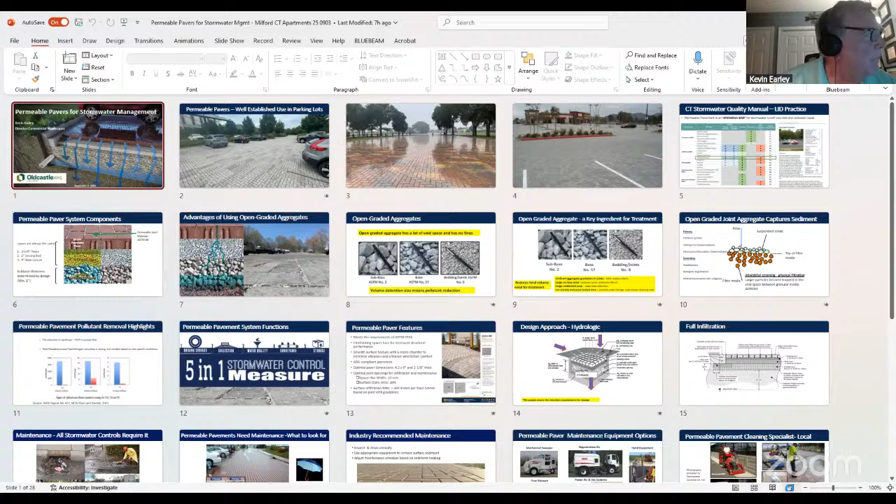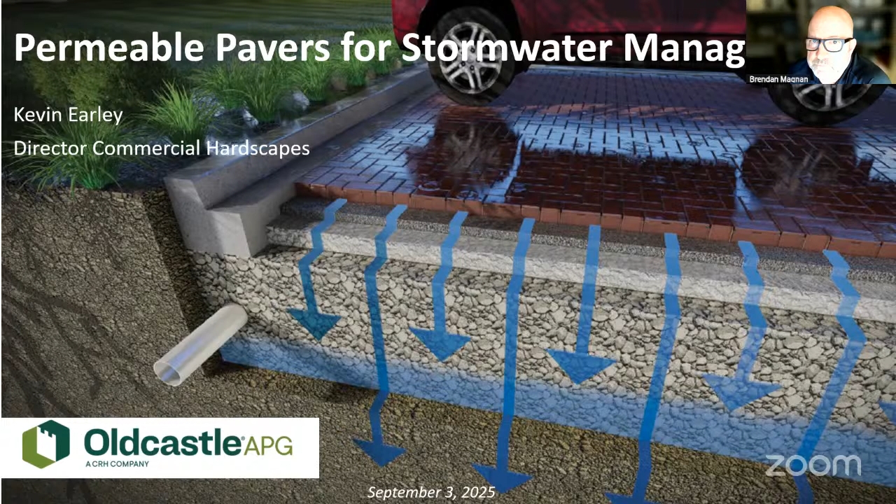So hello everybody, I'm Kevin Earley. I'm the technical service support person for Oldcastle, a manufacturer of permeable pavements. Like I said, I'm a licensed geologist. I've been in the concrete paving industry for over 25 years. My experience with the industry involves work with the American Society of Civil Engineers in creating standards. You have a copy of my resume.

I was asked by the applicant to give a short presentation on how permeable pavers work. This slide deck will explain how the system works and infiltrates stormwater as a green stormwater infrastructure. I've had the fortune of seeing permeable pavements throughout North America over the last decades, and there are hundreds of millions of square feet used around the country, primarily as a solution for addressing stormwater control, flood control, and water quality issues.

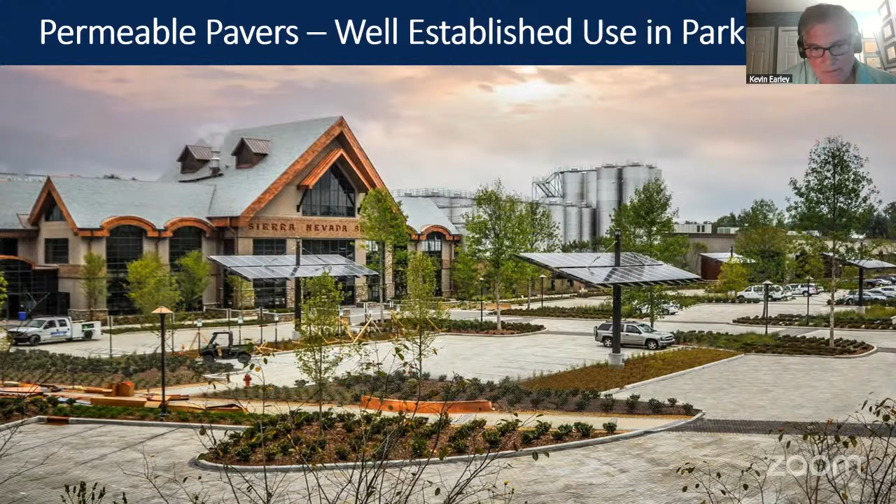It's become a very effective, recognized stormwater control measure. Every state in New England recognizes permeable pavers as a best management practice, as green stormwater infrastructure, including Connecticut. What we've seen is that it's very well established in parking lots. It seems to be the ideal application. Projects, whether residential or commercial, that have pavement can utilize it in a way that provides that surface but also infiltrates the stormwater in a nature-based solution. A lot of people don't realize it, but permeable pavers are recognized by the engineering industry, by the American Society for Testing and Materials, as a nature-based solution because of the way rainwater infiltrates these surfaces.

So what we have are pavers in this particular parking lot here on the East Coast that have joints. Those joints, as previously referenced, have 11% surface open area, and basically eliminate stormwater runoff because the aggregates in the joints and the underlying materials are highly permeable. I hope to explain that to you. Here's a picture of a permeable pavement municipal parking lot in a heavy rainstorm event, and it is basically drinking the water into the reservoir.

So well established, and then within the stormwater quality manual in Connecticut, everybody recognizes that it is an infiltration BMP, right out of table 8-1, and it is recognized for not only retention but water quality treatment. In fact, in a lot of states in the United States, it gives presumptive credits because it's well recognized that when we run rainwater through aggregate, we get by default filtering and removal of pollutants.

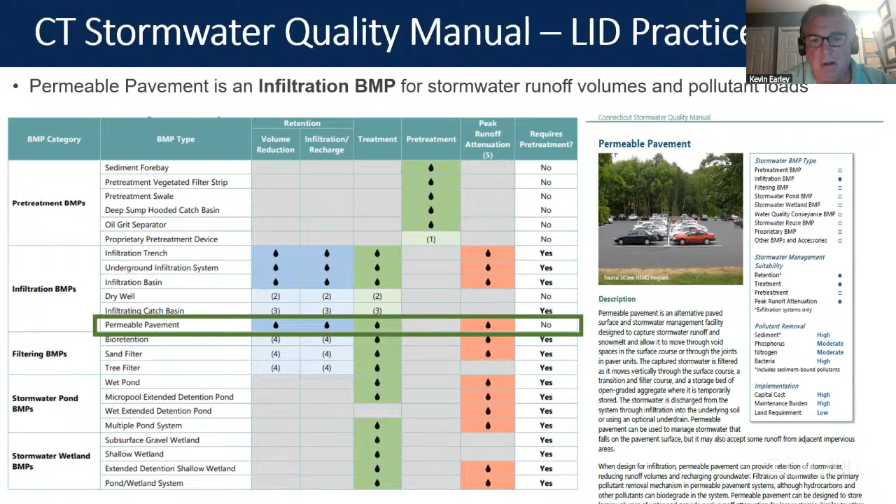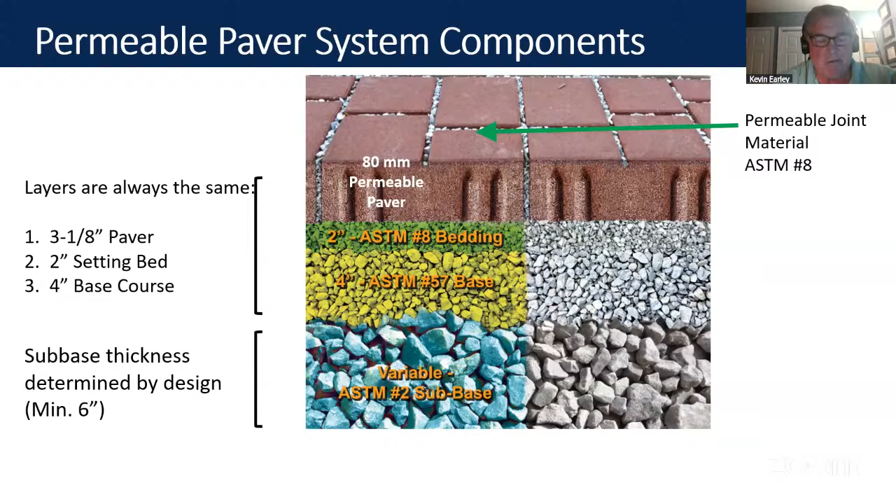So these typical assemblies involve a concrete paver that's typically 3 1/8 inch thick, which is what the applicant has proposed, with these permeable joints filled with an aggregate, and they sit on a bedding layer that is chip gravel, a highly permeable material. It's available at all quarries throughout New England, and it sits on this layering of open graded aggregate. I'd like to explain what open graded aggregate is, but this is the industry minimum cross section, and you can see that the applicant has more than the minimum subbase thickness required based on site specific design.

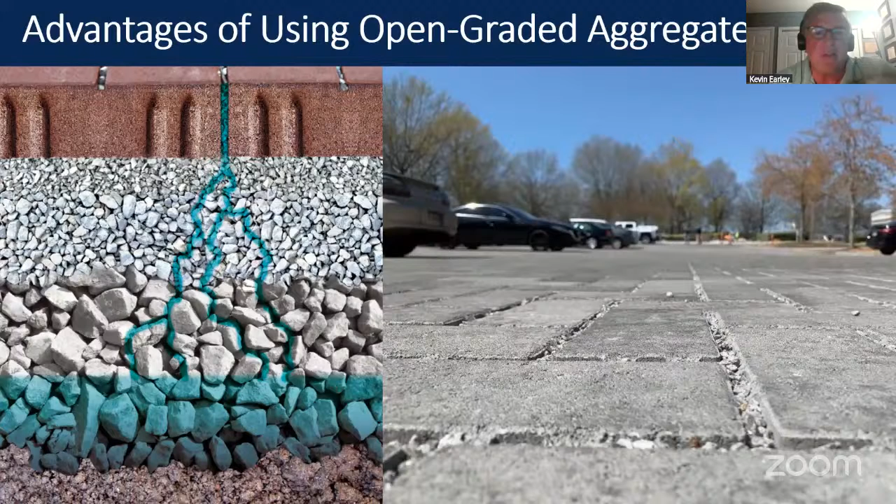So what are the aggregates? They're called open graded aggregates. In the past, when you constructed any parking lot or roadway, you used dense graded aggregates, the traditional road base that's outside of everybody's parking lot today, right? That's dense graded aggregate that has a lot of different particle sizes. This material has a very narrow range, and it's gapped so that it creates void space.

Most regulations give it a 40% void space, so that's volume detention in that aggregate. But along with that comes a high flow or high permeability capability, and there's no fines in the material. So think of it as the quarry fractures the rock and sizes it.

It's very easy to specify this because they have screens. They wash it, and this would commonly be called in New England drainage stone. It's got the same structural capabilities, but it's got a lot of advantages. One advantage is that by not having the fines, it's not susceptible to frost.

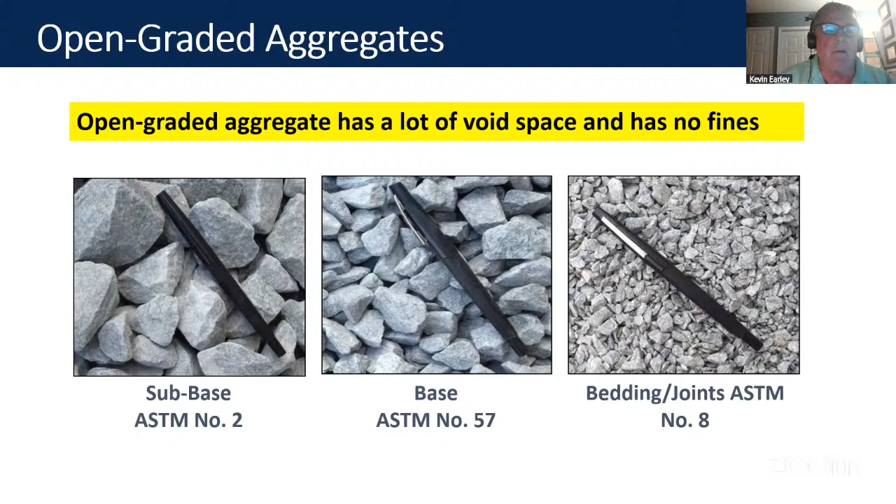They want to keep water out of roadway base material because when that base material gets wet, those fine particles lubricate and get weak. Also, that material can freeze and limit the permeability. The open graded aggregate has the same permeability and structural capability, whether it's frozen, wet, or not. So when I have void space, I have volume detention.

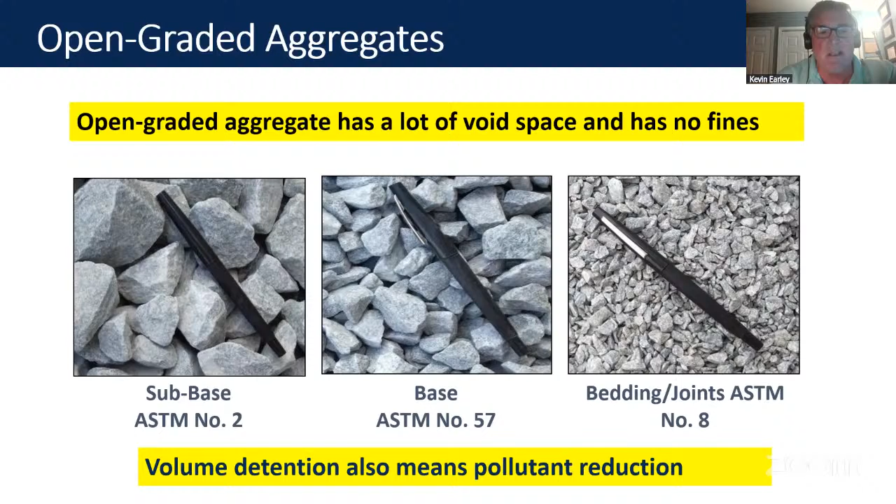Whenever I'm holding volume, whether it's a detention basin or not, I'm starting pollutant reduction. Think of this as maybe like a basin that has pavers on top of it. It's really quite similar. So what are the other features of this?

When you're using these aggregates in the joints, they meet a filter criteria, so of course they're going to capture sediments. That's why New Jersey says by default, TSS 80% removal. If you believe that sediment will get into the joints, well, then it's cleaning it.

Total suspended solids is one of the most common pollutants of concern because it's a tracer of pollutants, whether it's nutrients or other pollutants. It's one of the easiest to track for pollutants.

The other thing is there's a large surface area. This is important because in a parking lot, if you have a dripping oil, people ask what's going to happen to it. Well, if the oil even migrates very far, which it seldom does because it gets hung up on essentially large surface areas, you've got a glob of oil on an aggregate in an oxygen-rich, moist environment very often, and that's perfect for biodegradation.

There are numerous studies in academia that show that in all permeable pavement systems that use open-graded aggregates, you can not only capture any pollutants before they leave the pavement, but it biodegrades. University of New Hampshire proved in a permeable pavement study with this exact same paver as proposed, several years ago at their stormwater center, that we have mass load reduction.

We've got basically a collection box for the rainwater to either filter or settle out, and that includes nutrients. I'll explain how that works as well. So when you have water entering rapidly, at the bottom is going to be the subgrade soil, right?

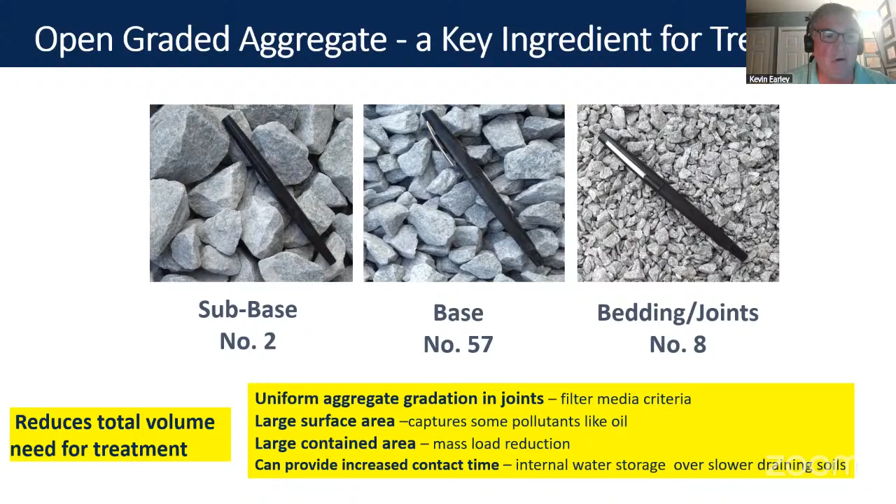So when you have water that sits there, denitrification occurs, and there's documented academic research that we are removing nutrients and phosphorus. Whenever we reduce the volume, we get treatment, and these kinds of systems are proven to treat water quality.

A lot of people ask about capturing the sediments when they come in—they get caught near the surface, and that's a good thing. So we are capturing sediments because it acts like your air filter. Every air filter has an apparent opening size, and that's a consistent size.

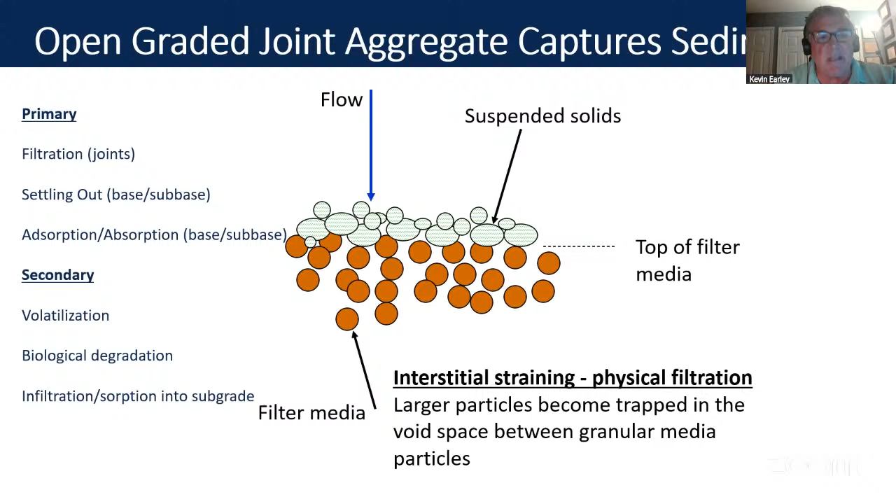It's very much like filter aggregate in those joints. So we're straining physically and grabbing particulate, and those particulates are a surrogate for pollutants when they're there. So we're filtering—if it gets through that, it's settling out, and then it can also absorb. There's some pollutants that will attach into the aggregate base, and then there's secondary processes going on, such as biodegradation.

So that's how it works. It is proven to remove TSS. It is a great filter, permeable interlocking concrete pavement. The documentation from University of North Carolina, from UNH, and from multiple academia shows that there is nutrient and phosphorus reduction.

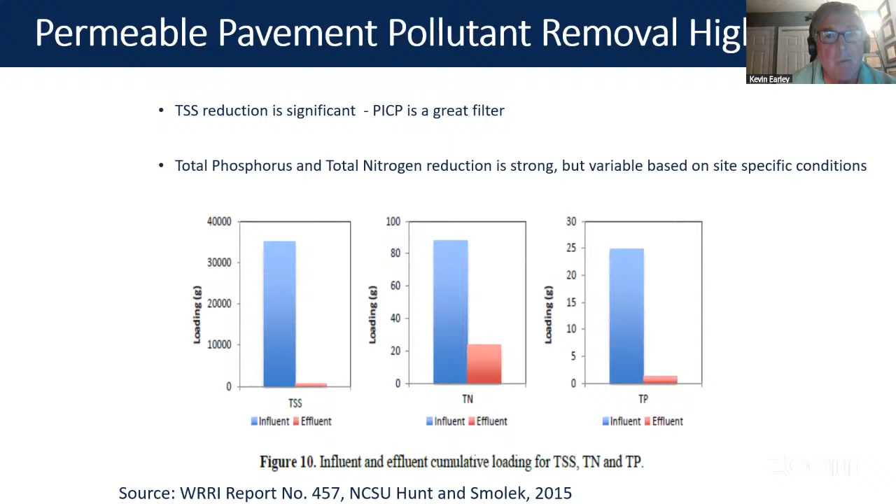It is based on site conditions and how long the water sits there. So what do we have in these systems? First, it's a driving surface - a heavy-duty pavement. There's no question we exceed strength requirements, with design data for up to 1 million axles by the American Society of Civil Engineers.

Second, it's a collection system. The openings are the inlets, and this is why it's considered green stormwater infrastructure. We are not concentrating the water in a stormwater inlet - that's gray infrastructure, which means high volume, high flow, and wherever that discharge is, you've got thermal loading too. Another benefit in treatment is when you infiltrate naturally into the ground over a large surface area like a parking lot, you avoid releasing warmed water into streams during the summer. These infiltration openings have a high surface infiltration rate, with plenty of test data showing well over 500 inches per hour.

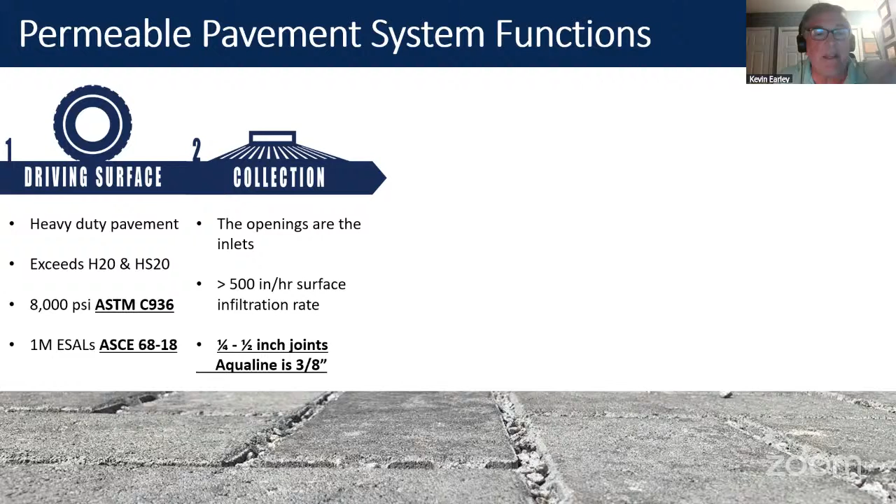So the surface is never the limiting factor. Those joints that produce that 11% open area are 3/8 of an inch, or 10 millimeters - exactly between 1/4 and 1/2 of an inch. That's a good thing because aggregates you can specify in New England, like ASTM number 8 stone, are 3/8 inch chip, so they fit the gap. A bigger gap is not better - it would let the aggregate leave the joint, and a smaller gap would make it harder to maintain. A lot of academic research has shown that's the sweet spot.

We talked about the water quality benefits, which include heavy metals - that's there. We're really conveying and moving the water. There's typically a slope, but a lot of places use it for delayed time release, so the rain event occurs, it goes through the system, and then if it has to come out, it comes out. That saves a lot on downstream effects. That's our problem when we pipe and gutter things - we take a high volume with a peak flow. So now when you infiltrate it in a nature-based solution like permeable pavement...

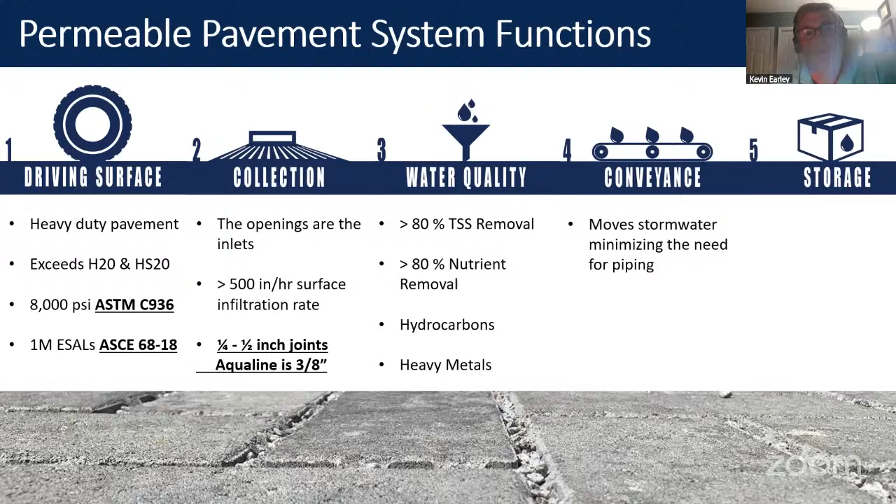Mr. Earley, it seems like you're frozen on the screen and we lost your audio. Amaris, is that what you're seeing on your side? Yeah, we've got a static screen and I've lost visual with him. Yep, and he's dropped off. Yeah, so he probably had a technical issue with his internet.

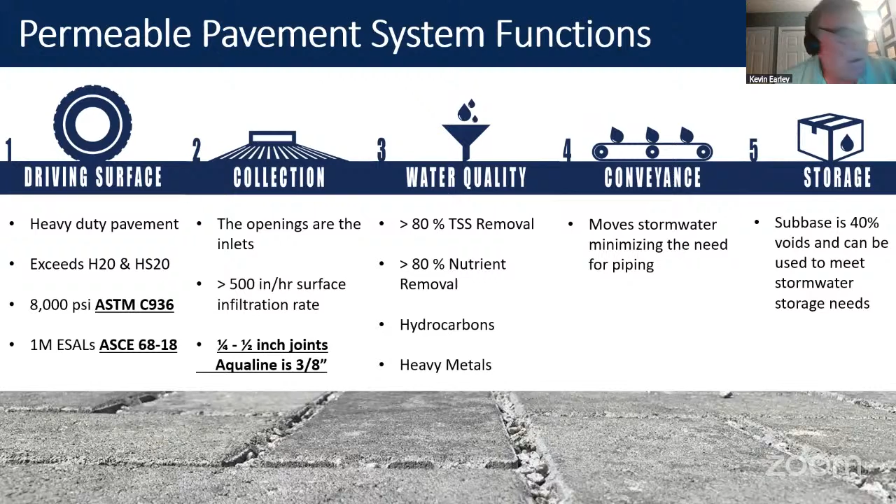Let's see if this works here. All right, are you seeing? Yes, we are. All right, so I don't know if you had heard, but I was talking about the permeable paver features. It was your last point on the prior slide that you were speaking to when we lost you, under storage. Storage, okay, so I apologize about that, I don't know what happened. No problem - in my experience using all these broadcasting systems, Zoom to me is the least stable.

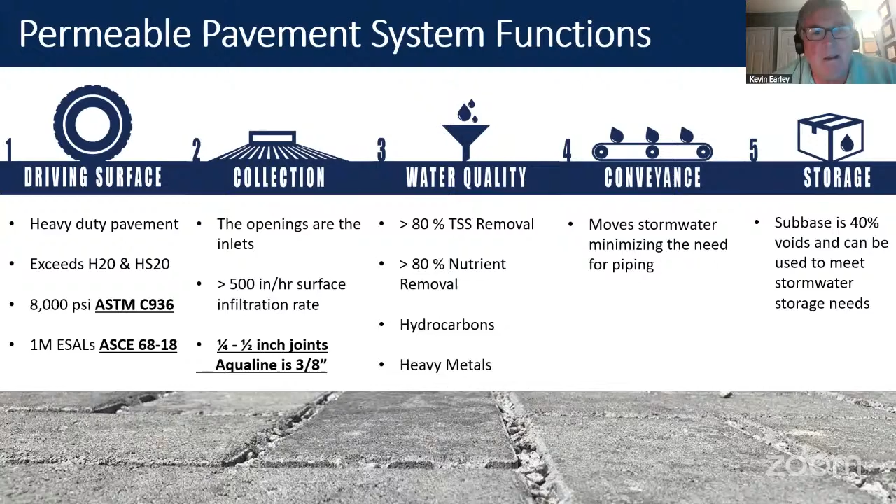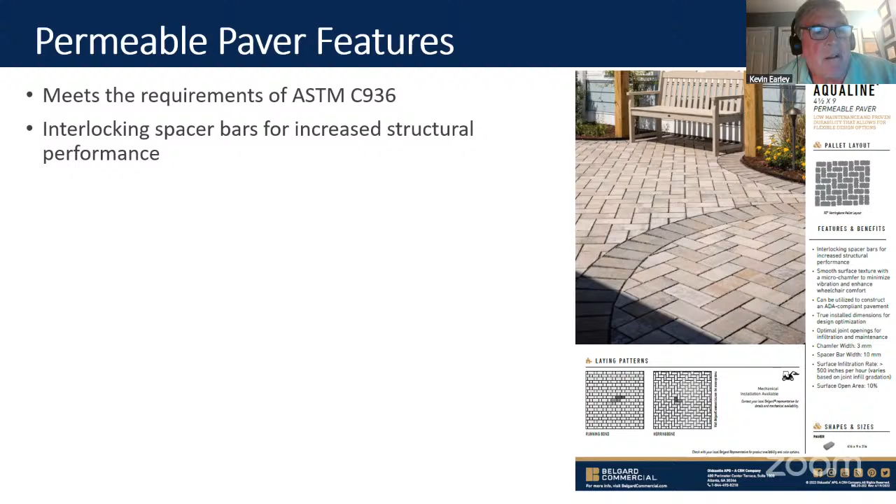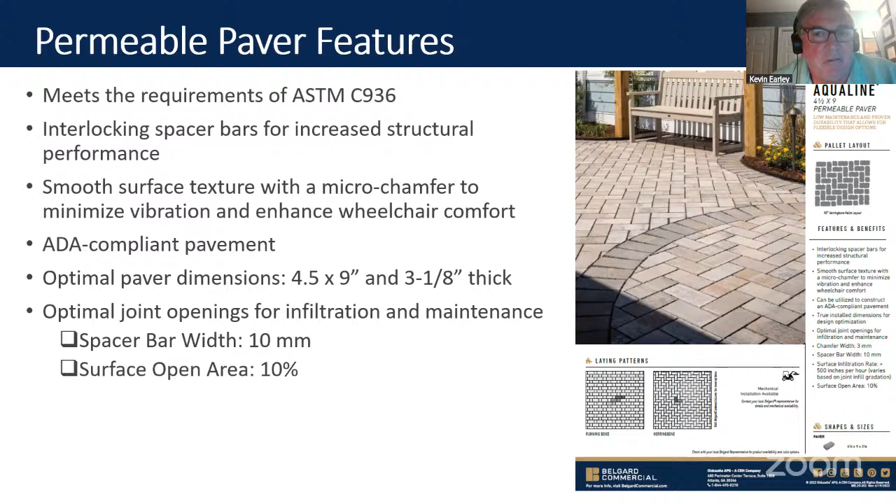Anyway, so yeah, there is the storage benefit of having all that open graded aggregate, and you get those 5 benefits. The permeable paver proposed by the applicant is a rectangle, which is structurally the most ideal paver as far as strength and interlock. The product has spacer bars, a smooth surface, and it's used for ADA. It's got micro chamfers - it's really at an optimal size, with an optimal opening for infiltration and maintenance. These are the things on the spec sheet that you've probably seen.

So just to summarize how the design works with permeable pavers: you consider the design storm requirements, any contributory drainage, which in this case is not significant, if anything, and you basically design these systems for that type of detention.

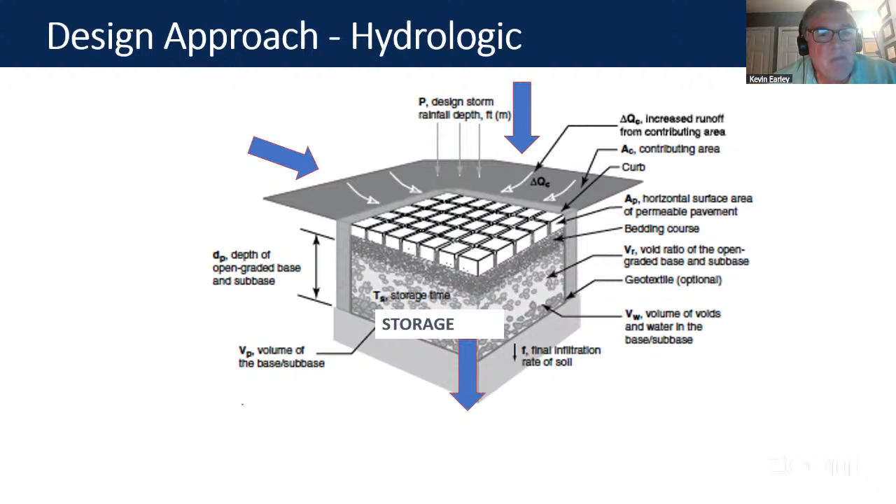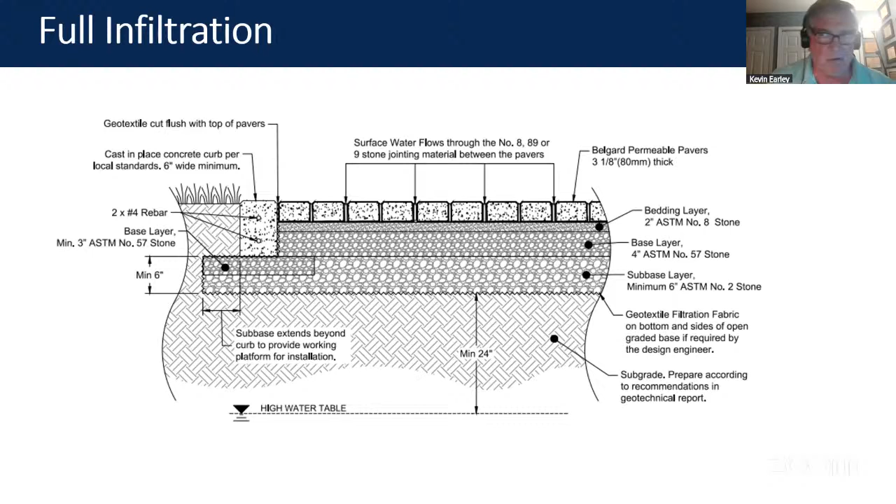And that's what the applicant has done to meet the retention requirements. In their submittal package, you have a typical infiltration detail where there's more than the minimum subbase required by industry standards. Notice the 2 feet separation, which is the requirement in Connecticut when you don't have non-potable water.

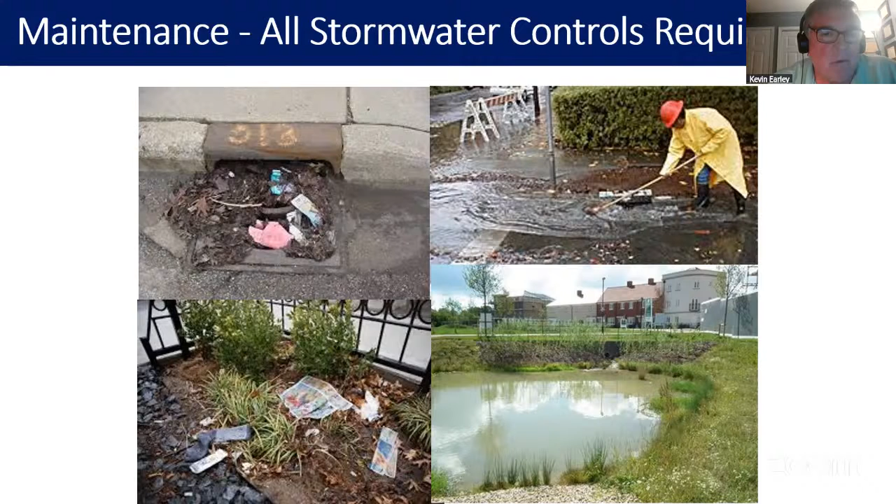There was a question I was asked about maintenance. All stormwater control measures require maintenance, the traditional ones as well as the green infrastructure ones. I think it's one of the best advantages: if there is sediment causing clogging, you see it, and it's very easy to maintain because it comes in along the side, but it's a very isolated hotspot. That's because when the rainwater hits areas where the joints have picked up sediment, it gets resistance to flow, so it goes left and right because it's a heavy downpour until it can infiltrate.

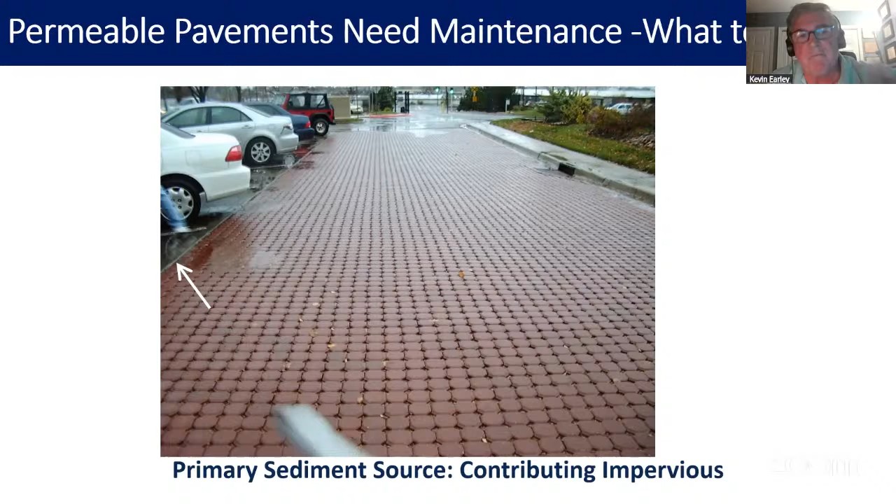There's a lot of research showing this is the ideal scenario. Much like your air filter still works, clogging is not an issue, it's a reduction in flow. But we have high flow on these permeable pavements. These test out initially at 700 to 800 inches per hour, and as we collect sediment, as it works as designed, that will come down. But 700 to 800 inches per hour is several orders above the subgrade infiltration. So your air filters, your HVAC, still works when you collect sediment in your air filter. It's the same kind of thing.

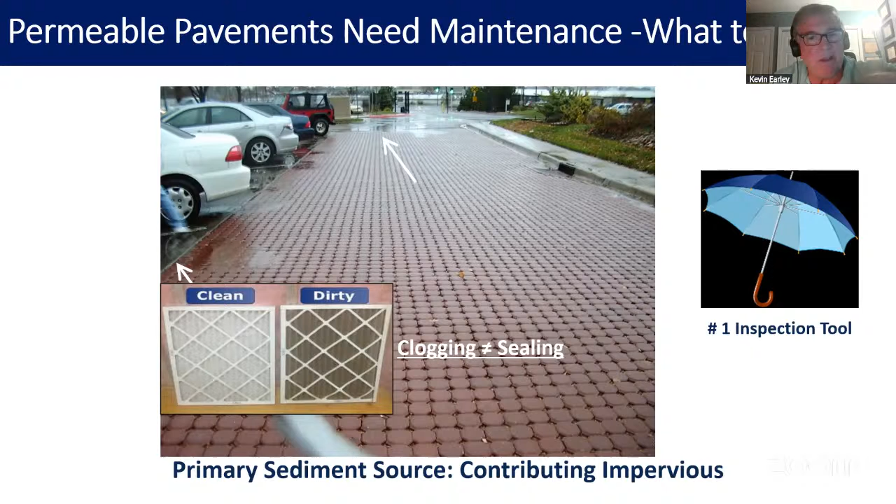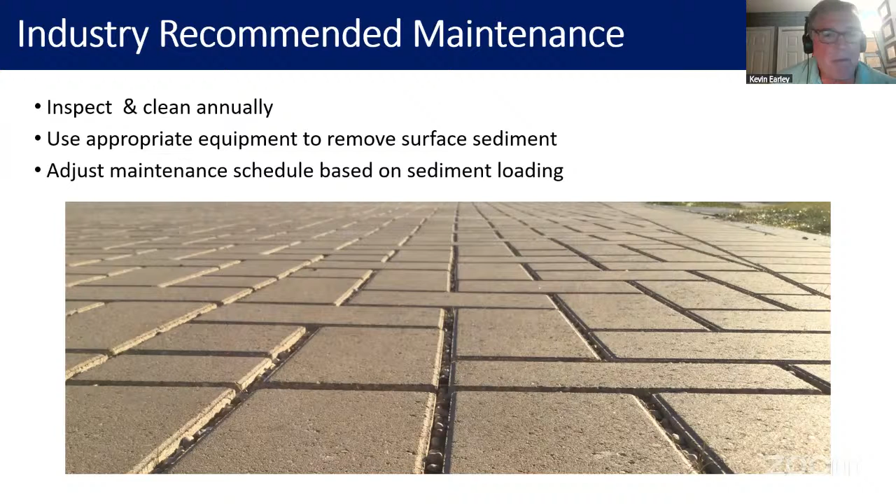So you can see this. Other stormwater control measures that have confined space are tough to inspect. These are easy, and the industry has guidelines on specific cleaning. You want to do routine maintenance to just keep that crust from developing. It can be done with a range of equipment. There's no shortage of machinery designed to clean pavements.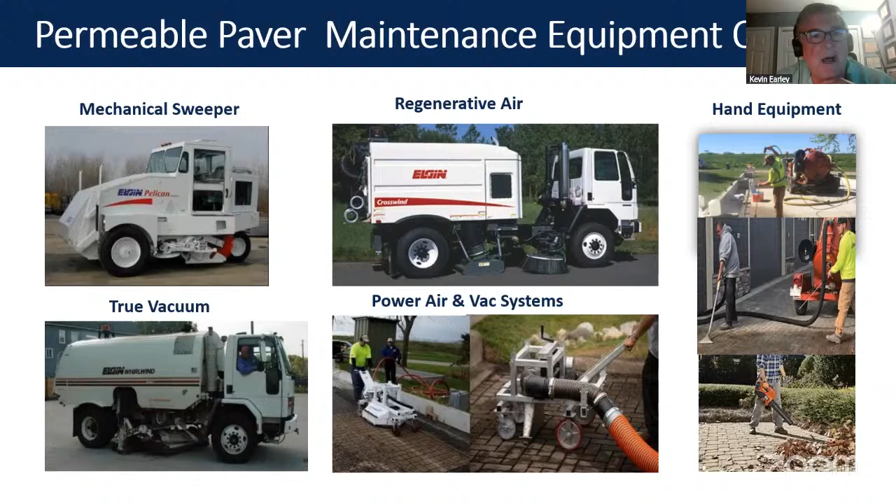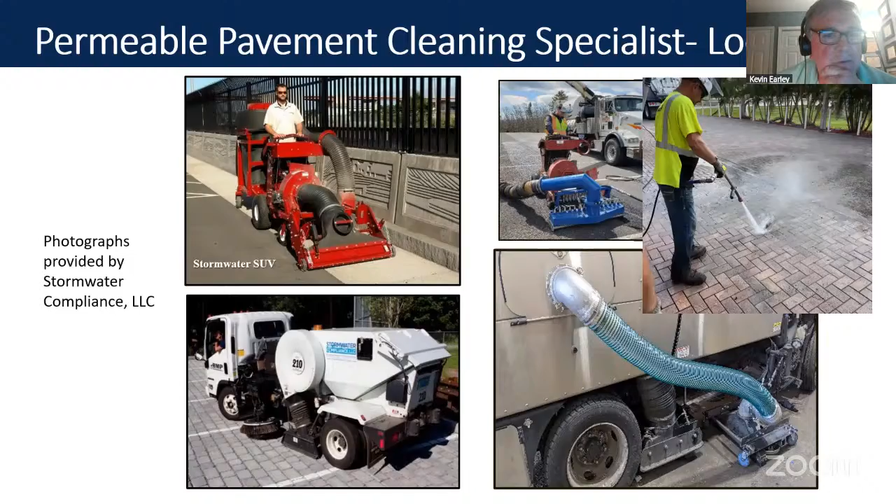There's such a thing as, I think, 1-800 Sweeper, probably right in your area, where you can get mechanical sweepers that can not only clean those joints, but have a vacuum assist to put sediment in the hopper. And there's all kinds of things, even backpack leaf blowers - I see a lot of utility people use those to maintain them. There's companies, one in New England, Stormwater Compliance, that specializes in cleaning permeable pavements. So plenty of equipment, plenty of solutions, easy to replace joint aggregate if it's lost.

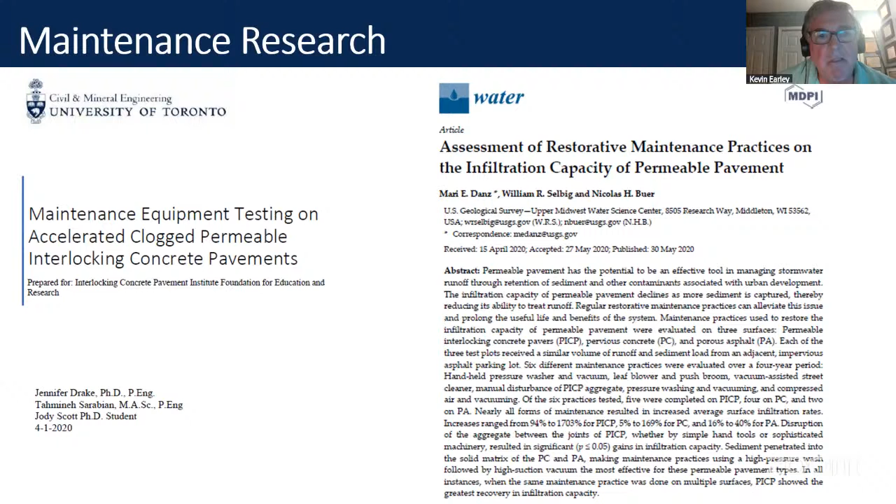It used to be, do permeable pavements work? We are well beyond that. It's pretty well understood by every regulatory agency at the federal and state level that this is a BMP. That's why it's in the Connecticut manual. A lot of people say, well, what about the maintenance? In the last 5 years, there's been a lot of research on the maintenance capacity and equipment testing.

I'll highlight one example: the US EPA's ongoing testing of clogging of permeable pavements, and just the conclusions of this ongoing research. This is done at a site in New Jersey, showing that the clogging is not random, it's isolated where you'd expect, and it's slow. It takes a long time for these systems to be a problem where you have to restore the joint infill. This site in particular is ideal because there's no contributory drainage that would bring runoff from impervious surface, and roof drains are clean, so when piped into the system, they don't impede the rainwater infiltration.

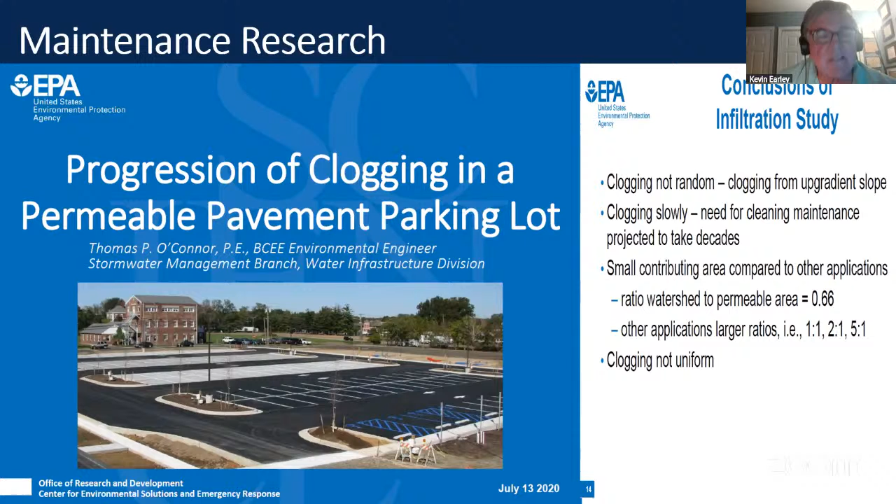They're piped right into the system, and a lot of systems can take a lot of water from roof drains if the space is done. This is why it's considered 100% pervious. There are academic references that say these systems don't produce runoff, and I've seen it documented by academia. When they don't have contributory drainage area in particular, the water is going to go into the system, and what happens inside the system is a function of the subgrade soils. In your case, you have good soils.

People ask about winter performance. This really is a selling feature of eliminating black ice.

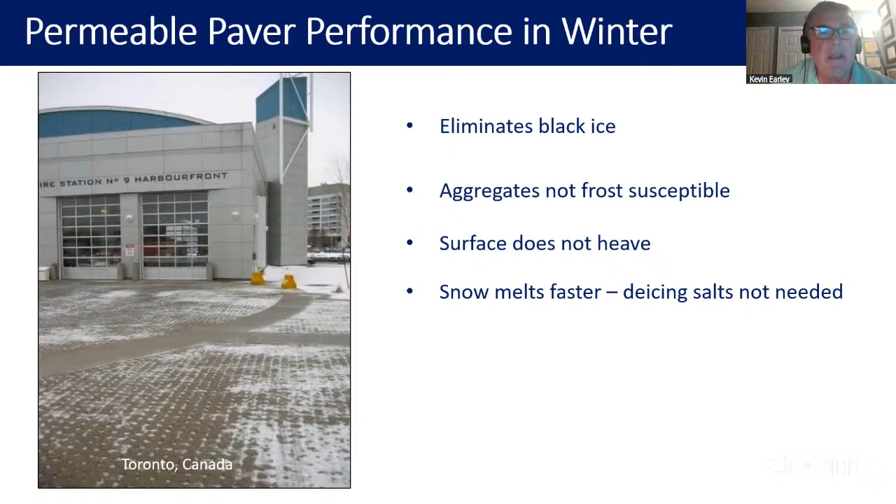Municipalities spend a lot of money on de-icing salts, which is bad for the environment, and that's because of the refreeze at night. Well, when you have a permeable pavement surface that infiltrates at the surface, you don't have the black ice. Second, the aggregates are clean, not susceptible to frost, and you've got that void space. So these systems are very stable and don't get interfered with by winter conditions.

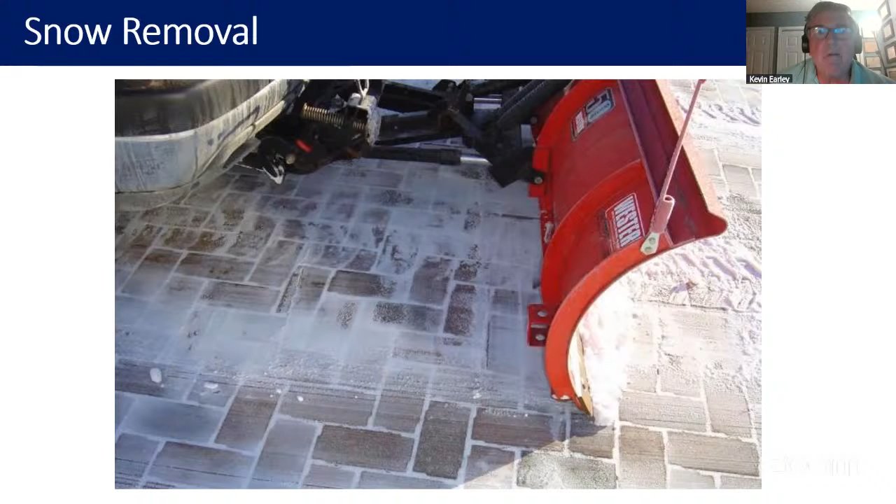In fact, they're used more frequently per capita in Canada than the United States, and they're used in New England and in Europe. They can be plowed. People ask, can they be plowed all the time? Remember, they have a chamfer, and they are regularly plowed on surfaces.

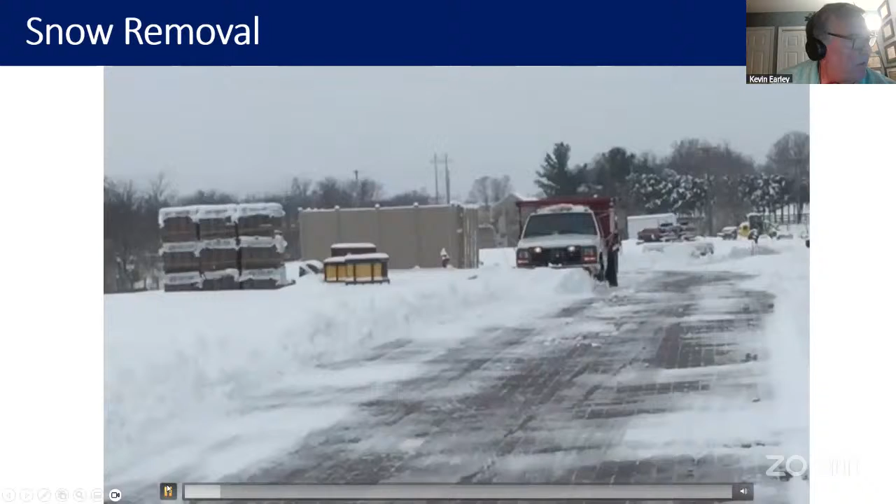Actually, I think this thing plays. I don't know if you can see it, but people ask if it can be plowed, and of course they can be plowed.

So I'll leave you with one last thought from a professor at the University of Connecticut, Professor John Rosen, who has been advocating green stormwater infrastructure. His whole premise is that traditional design takes the water and says, let's collect it, pipe it, and centralize it, and that's where we manage the stormwater. So curb, gutter, pipe, pond is a very common solution because they know exactly the volume they have to manage. But it's old school, and in many municipalities and some states it's no longer acceptable.

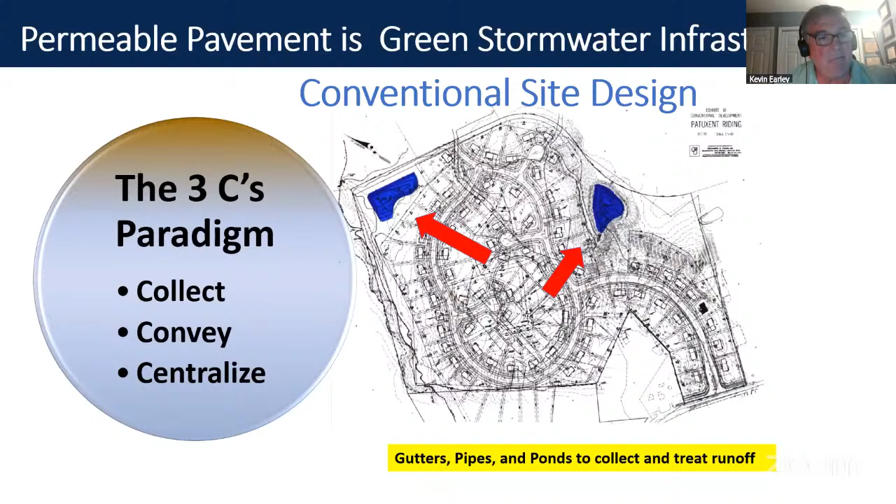You have to use LID. He basically said the 3 C's have shifted to the 3 D's: you want to distribute and decentralize the water. Well, a pavement and the joints in a pavement area distribute the water. That's why it's a nature-based solution, and why everybody considers it green stormwater infrastructure. It's a decentralized process because you're infiltrating it right there. So I think the future really is low impact development.

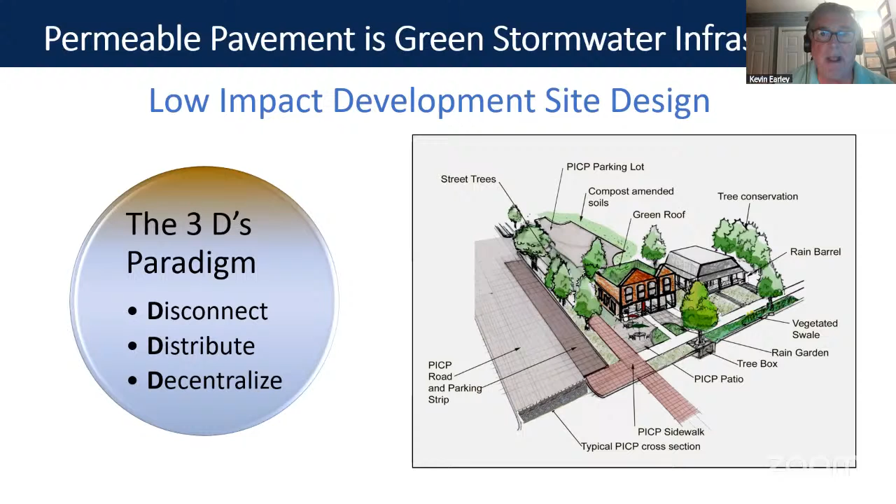So unless there are any questions, Mr. Chair, that concludes my testimony.

Thank you, Mr. Earley. My only observation and request would be on the slide you referenced regarding the clogging study for the EPA, if you could provide that following up. Yes, we could do that. I'm sure there may be others with questions, but that's just top of mind.

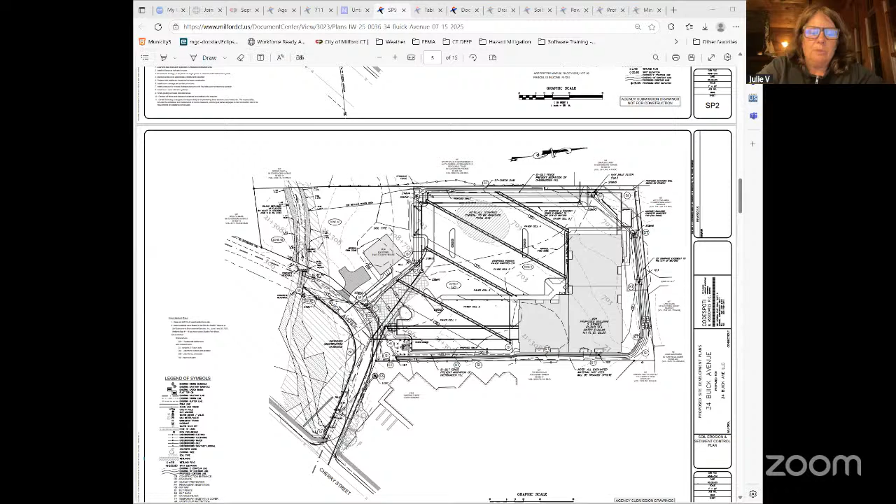Through you, Mr. Chair, you actually just touched on a concern that I have, which is the flooding concerns on Sunnyside, where residents currently have flooding issues. I'm afraid this project could potentially negatively impact the flow that's already there and potentially make it worse. With what you have planned, do you anticipate that making the drainage better from what's happening over there? A lot of folks complain that when it rains, they get a lot of backlog in their yards. If there were more negative impact on increased flooding to their properties, what would happen with that?

Yeah, the only thing I'd like to caution is we need to be focused on the wetlands impact as far as flooding. That's not wetlands? Okay, well, flooding is a gray line, but I just want to make sure we're balancing the statutes around that.

Through you, Mr. Chairman, the Wetland Agency does not have control of flooding. Where we ask flooding questions is if this area floods, will there be additional materials running into the wetlands that could negatively impact them? Will the speed of the water getting into the wetlands additionally erode an area or cause a problem in the wetlands—dumping material debris, eroding away surfaces, impacting the water quality in the wetland and the turbidity in the wetland.

Thank you, thank you for that clarification. Mr. Ricci?

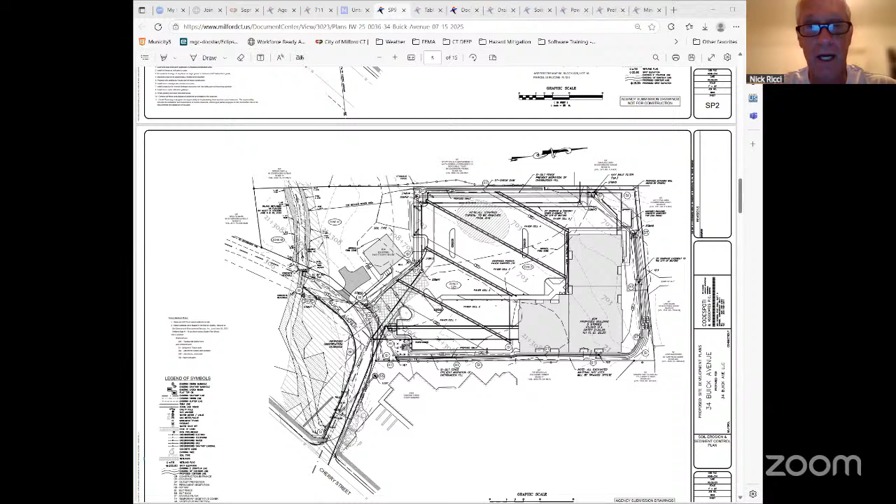I don't know if I could even speak on behalf of the Wetlands Commission about this, since what Mary Rose said. I am familiar with Stubby Plain Brook. It comes from northern Milford, it goes from 0 to 100 in a rainstorm, and upstream it affects downstream. My concern is the overall scope of the project and any overflow from the river in that rain event, where the parking lot, the permeable pavers, and the building are—there's grass and trees there now, which have the ability to slowly absorb that runoff and filter it before it goes into the water course. I don't know if that would be in our purview to discuss now.

Kind of like what you just said—you just expressed a concern that is in our purview. So okay, I believe Mr. Weiwei can address that. And Mr. Weiwei, could you please address the general flooding concerns just for our information as well?

With regards to flooding, when you take a look at the 100-year floodplain, with the exception of the Buick Avenue improvements and our initial driveway access coming up to the first paver cell, the rest of the project is going to be outside of the floodplain. So when Stubby Plain Brook floods and overtops the culverts, gets backed up at the next culvert down by Cherry Street, and that water backs up through Buick Avenue, our project is basically above that flood elevation. And as I pointed out, our paver system is not going to be releasing any surface flow to the adjacent areas in Stubby Plain Brook.

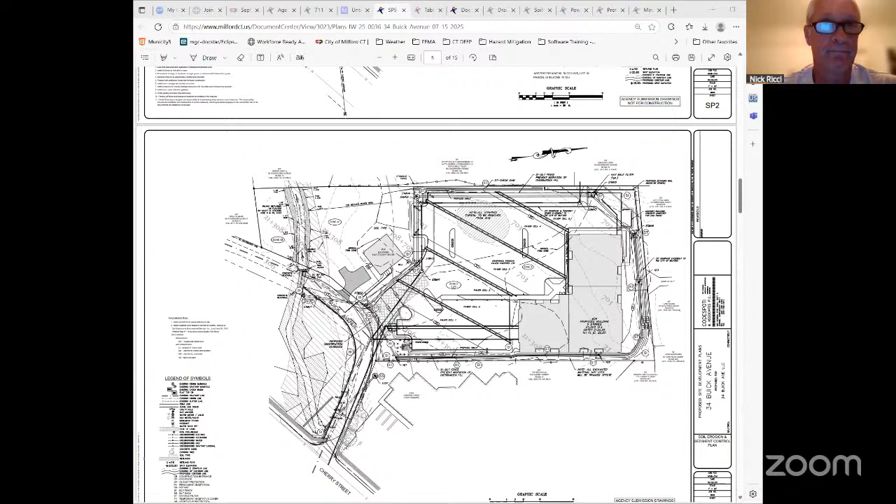Yeah, I think the simple answer to that is when we look at Sunnyside Court and several of the neighbors that presented at the last meeting, Sunnyside Court is probably 10 feet higher than our site. So we have no impact on Sunnyside Court. Sunnyside Court impacts us. And likewise with some of the other neighbors that had testimony regarding flooding of Stubby Plain Brook and everything else, they are up gradient of us. So again, we're lower - we're not backing up any water in Stubby Plain Brook. So those concerns, while valid, really have nothing to do with our project.

Thank you, Mr. Weiwei. On a related note, it seems apparent to me as I reflect on the expert testimony from Mr. Earley - is it Mr. Earley, or Curly? Yes, sorry.

Listening to his testimony, listening to your prior testimony, looking at this design, would you characterize this design as sort of a hybrid, putting aside the Buick Avenue portion - the bigger paver system and - would you try to explain this? What I'm gathering from the testimony is that this application is a combination of the low impact development with the pavers, as well as, as Mr. Earley said, the old school design. It's a combination - it's got those designs on the outer perimeter of the property for the 100-year storm to distribute water. Am I characterizing that correctly?

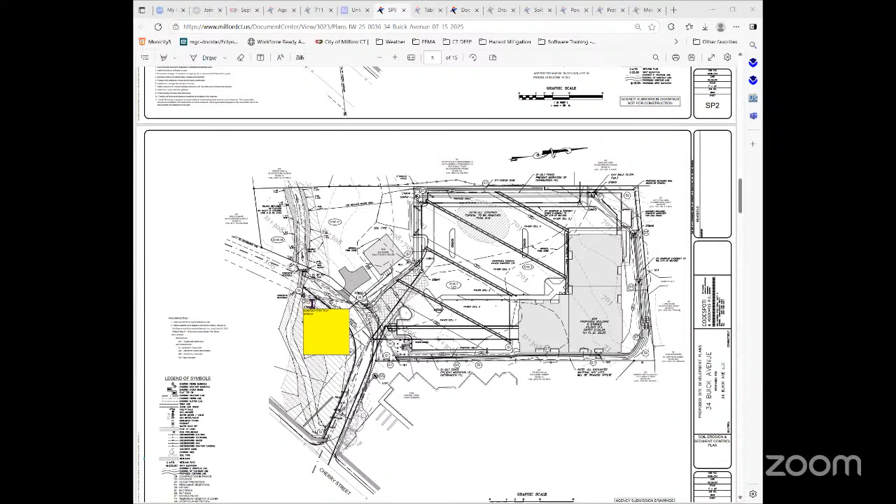No, not the paver system. No, the paver system does not. With what Mr. Earley was getting into in the slide, and I think this is typical of probably 95% of the applications this commission sees, particularly on smaller sites, everything is collected through a catch basin system. It's piped to an endpoint where it's treated through water quality structures, detention basins, or underground infiltration galleries. That does not happen here because we don't have a piped system directing water from the surface.

We do have an underdrain system, but it's basically used to convey stormwater and distribute it throughout the paver cell system. The pipes in there are small, 4-inch perforated pipes that distribute collected water throughout the paver cells. Then, in the case where a paver cell fills up—more pertinent during the 50 and 100-year events—you get a waterfall effect where overflow from paver cell 5 drops to cell 4, then cell 3, until it reaches cell 1.

Right, but just to cut in, what I'm trying to acknowledge is, if I'm understanding your design correctly regarding the wetlands and watercourses, it's a combination—a hybrid approach. You've got a proposed paver system in the center of the diagram, and you've got these interflow directors. I'm not using the right technical terms, but I'm just trying to acknowledge it's not all or nothing, it's a combination.

So if we took the Sunnyside Court drainage problem off the table—if there were no upstream drainage issues—then that pipe system we're proposing wouldn't be there, and we'd handle everything through the paver system. But we did recognize there is an upstream drainage problem, and that overflow is actually a detriment to our site under present conditions. It comes onto our site. So we're basically intercepting that flow and rerouting it around our site so we don't have to treat off-site runoff that's not our responsibility.

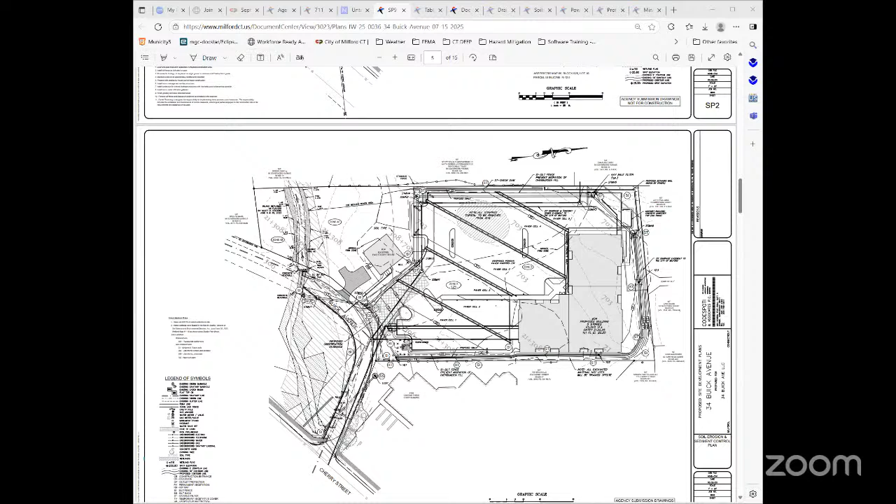Any other questions for the applicant or the expert?